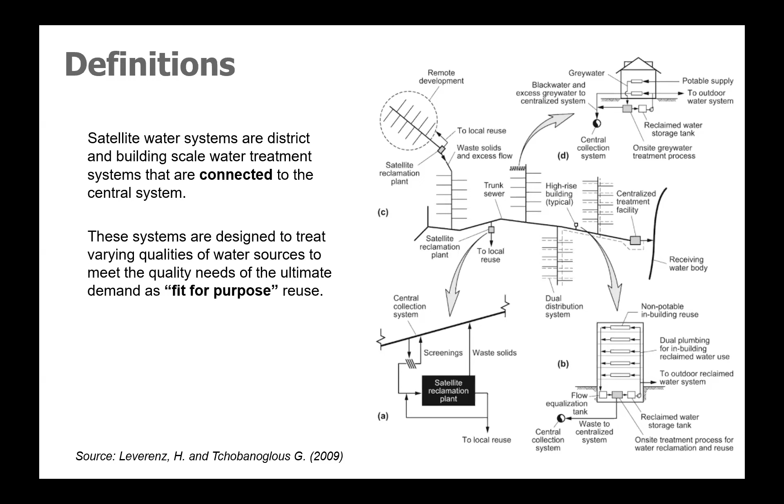One of the great opportunities we have with implementing these distributed solutions is that you can treat the water to fit the end use purpose. For example, you might have a different water quality objective for, say, industrial cooling versus irrigation of a park or flushing toilets. So fit-for-purpose water reuse is an advantage of this type of approach.

I just like to throw a few ideas out there about what that opportunity is. I mentioned residential buildings, I mentioned some commercial buildings, right? So it's not always about extracting wastewater. It can also be about harvesting rainwater or harvesting stormwater, two very different supplies.

Those can then be used for, say, what you see in the top right there, for cooling applications, right? And what we tend to see with the use of rainwater and stormwater is that it's quite seasonal here, and I'll get into that a little bit later.

On the bottom right, you might see more of a district, and this is representing a mining system that I described above, for uses like golf course irrigation or even agricultural applications. So it's taking that water supply where it is most needed. And on the bottom left, you will see both gray water and black water, as they're called.

Together, they are wastewater coming together for on-site treatment to hit the big three, as I like to call them, the non-potable water uses of irrigation, toilet flush, and cooling, which is what we really see on these site-level commercial buildings.

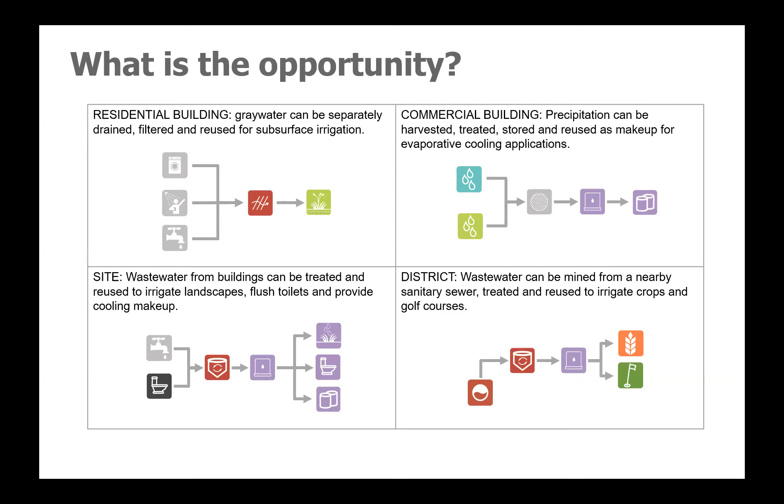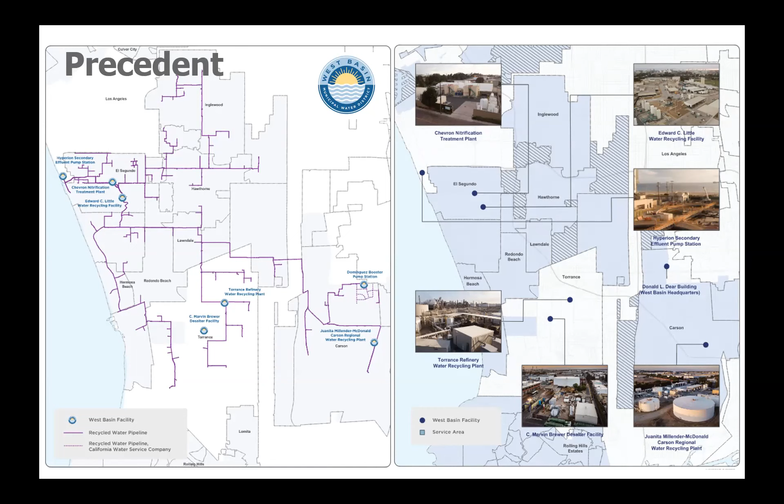I like to give this precedent to highlight that this infrastructure approach is not purely something deployed on a private level or even a site level. This is down in the LA area. The West Basin Municipal Water District has for many decades now deployed a distributed approach to water reuse. On the left is the recycled water network for distribution, and on the right is some of their facilities distributed throughout that network that perform reuse and other purification functions to serve that network.

This is really a satellite network deployed at the public utility level to help diversify the water supply down in Southern California. So a region that optimizes the system to take advantage of ideal scale will reap the benefits in terms of resilience, cost, GHG emissions, and water security.

I won't get too much into benefits here. Anne actually has a great presentation from a report she and the Pacific Institute are working on, so I'll just give you a teaser. But this is a nice graphic in terms of thinking about the network.

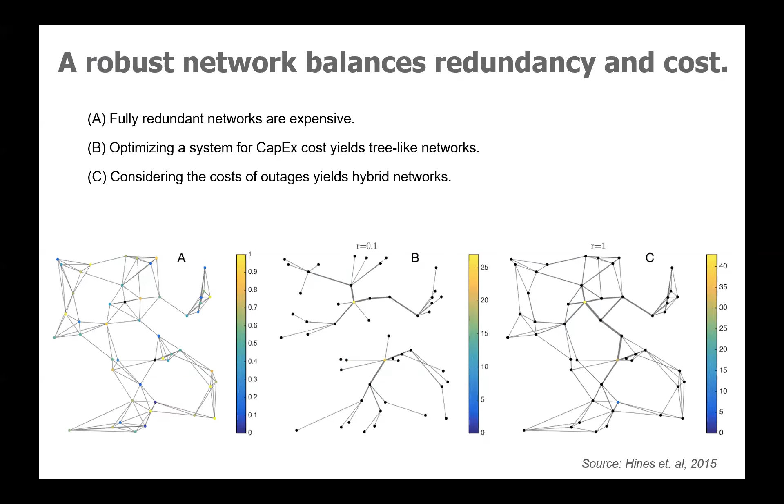So I keep talking about these networks, sort of in network theory and thinking. If you have a lot of redundancy, a great engineering term, you have so much resilience, but that's costly, so we can't have too much redundancy. But if you don't have enough redundancy, you have these very fragile nodes that if they break, you can lose a whole branch of a network. So what we are trying to balance as we rethink the way we supply and treat water at an urban level is what's the right balance of costliness and redundancy.

So I'd like to share that graphic—engineering design and why it matters to get it right. I'd like to point to some resources. There has been some really great work, especially here in the Bay Area, on this topic.

The on-site non-potable water reuse practice guide, I believe published in 2017, is actually linked now on the State Water Board's website for the page that links to the development of SB 966. It's a well-accepted resource for those considering these systems, so I highly recommend getting yourself a copy.

In addition, we have the National Blue Ribbon Commission for On-Site Non-Potable Water Systems and the U.S. Water Alliance—great national resources with a number of really great publications. SFPUC has been a partner with those organizations. I also like to highlight ReNUWIt, a research collaborative including Berkeley and Stanford here locally. Especially Stanford has their Codiga pilot facility now, which has been a tremendous resource for pilot testing of novel and small-scale technologies.

So reinventing our nation's urban water infrastructure is indeed what we are doing. I like to highlight that great academic resource we have here in Silicon Valley.

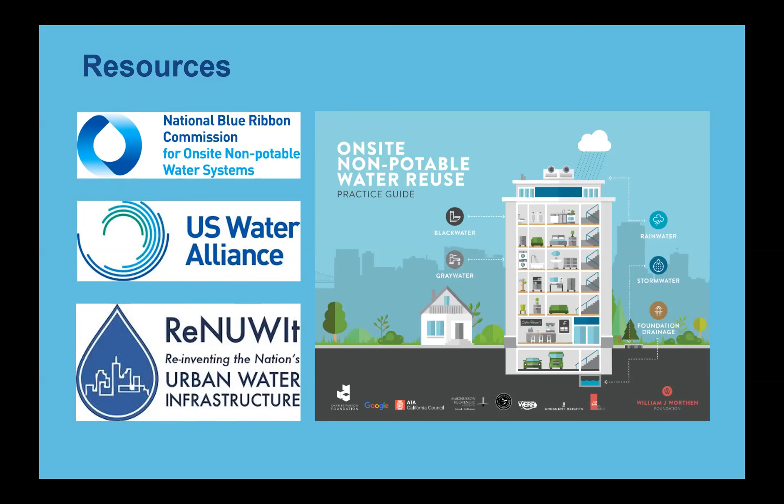So the engineering water balance concept: water balance is the idea that within a given area—what we call, in engineering terms, a control volume—we have to balance our resources. More and more we see new developments or existing areas looking at how best to manage their water resources, so we have to do an accounting. This is an example of that accounting, trying to understand the opportunity. This is really our first chance in the design process to identify where our resources are within that study area, and what our demands are.

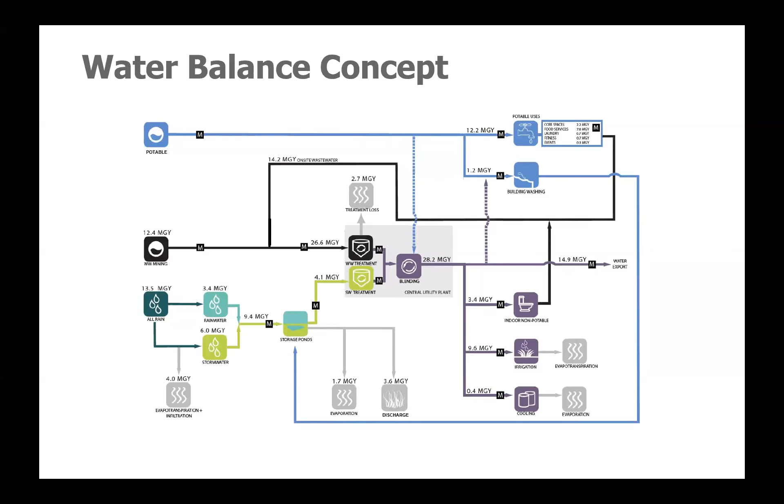It sounds simple enough, but as you can see with this diagram, it can get quite complex when we start to account for all the environmental water from rainfall, all the end uses like evaporative cooling, and some of the more unique potable water uses. And of course, potable water that makes it down the drain is a great resource as wastewater.

So just to keep it simple, there are some considerations when we think about how we size these on-site non-potable water systems. I'm going to focus in the next series of slides on a wastewater treatment system. In the wastewater world, we have flows and we have loads.

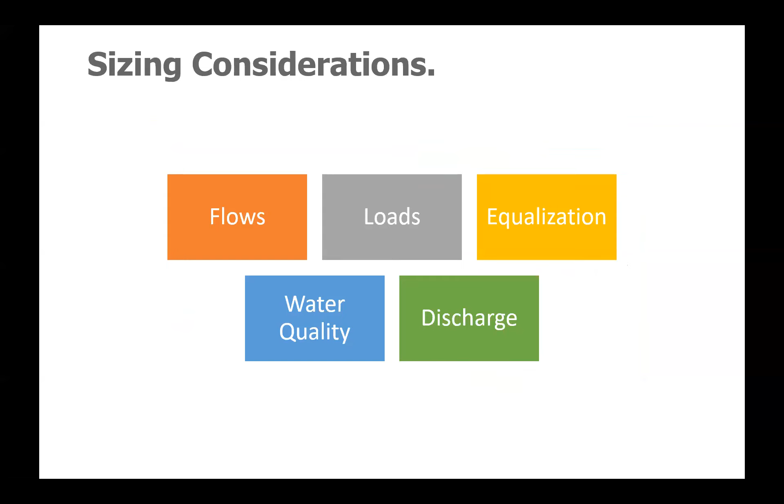That's sort of how we think about sizing treatment plants. But there are other on-site considerations, like at what pace are those flows coming and how we equalize them, what's the water quality, and what are my discharge requirements?

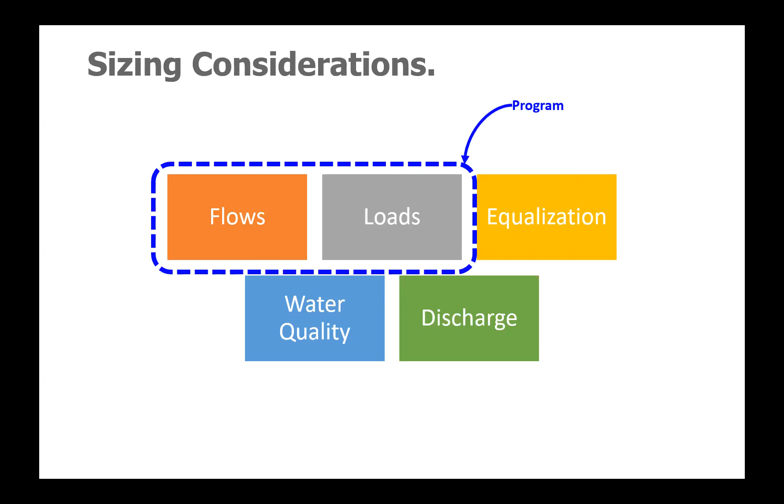So really focusing here on flows and loads, we can start to understand for maybe a facility where we don't have an understanding of what that water quality might be for a new building. We have to use the information we have, which is this idea of a program, the building program, to really identify how the system needs to be designed. There otherwise is no data.

So I'd like to use this SketchUp or bubble diagram to point out, when we talk about program, what are we talking about? This is an example of a school. How many students, how many people might come and visit the auditorium? Are people taking showers? Are there visitors? These are all very detailed considerations that have to be taken into account when you're looking at developing an on-site wastewater treatment system.

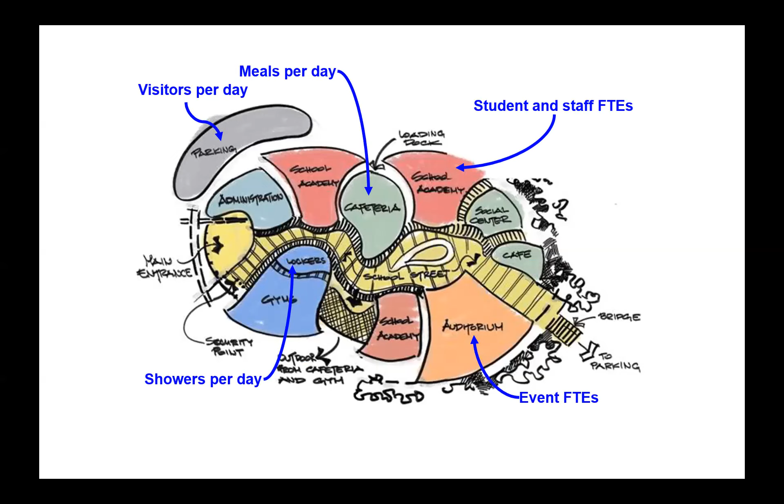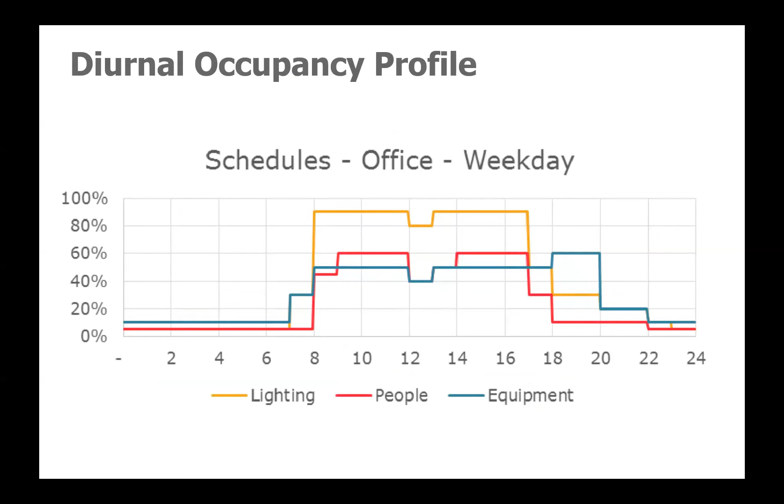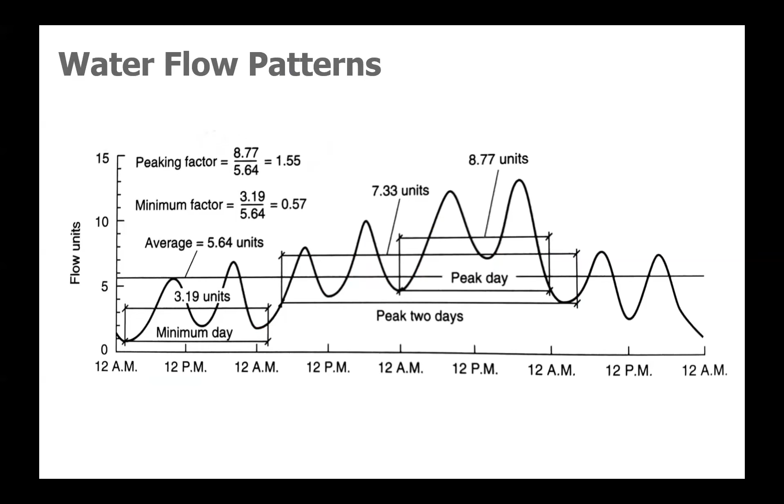We like to look at over the course of a day, how many people are coming in, when are they there. This is taking an example from the mechanical engineering world and applying it here to the water world, where we look at flow patterns and understand over the course of a week, a day, how is this building, how is this facility being used? This is a critical component of the design engineering process.

So we take the FTE, the full-time equivalents, and how much water they're using - the flows, how long are they there, this idea of dwell time - what load are they exerting while they're at this facility. It's not that people are living here; they go home at the end of the day if it's a school or institution.

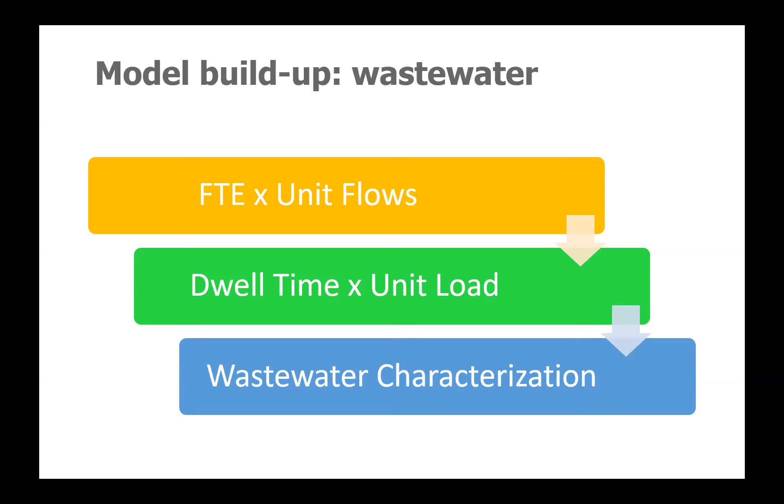And so we end up with what we call wastewater characterization. This is a very important part of the engineering design process and cannot be skipped. So then we decide, okay, what do we need to take? How do we take the waste out of this water? Generally we can think of solids, organics, and pathogens as the categories we need to look at. So when we do the treatment design, we're looking at all of these factors.

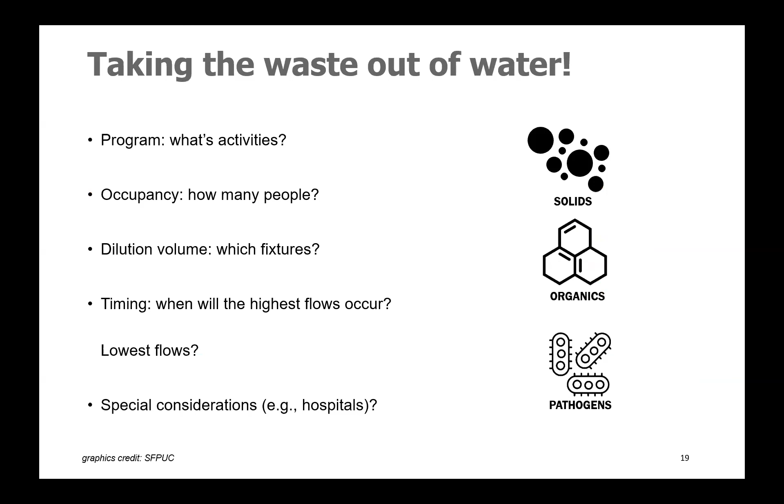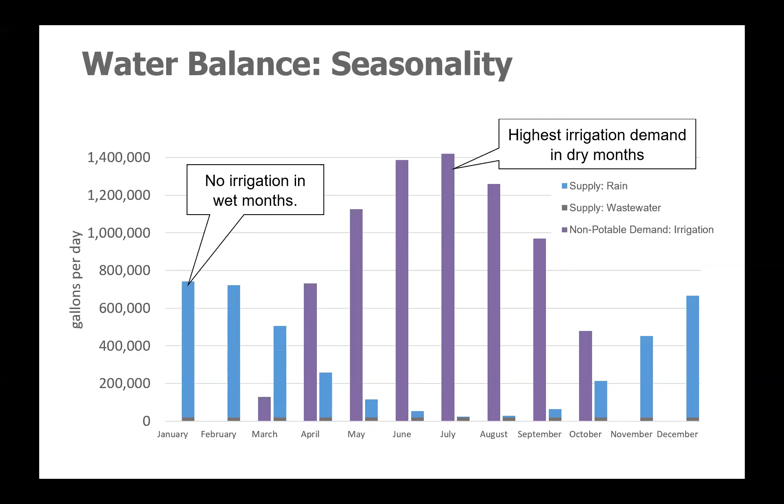What we see is that we have a very high demand in the summer months - June, July are shown as the peak in this graph. And then we have the natural supply of rain when we don't really need irrigation, but we don't have enough of that rain to really store it and use it throughout the rest of the year - that would be expensive. So that's where we really have this constant supply of wastewater coming in. Seasonal variability is also a very important part of the engineering process.

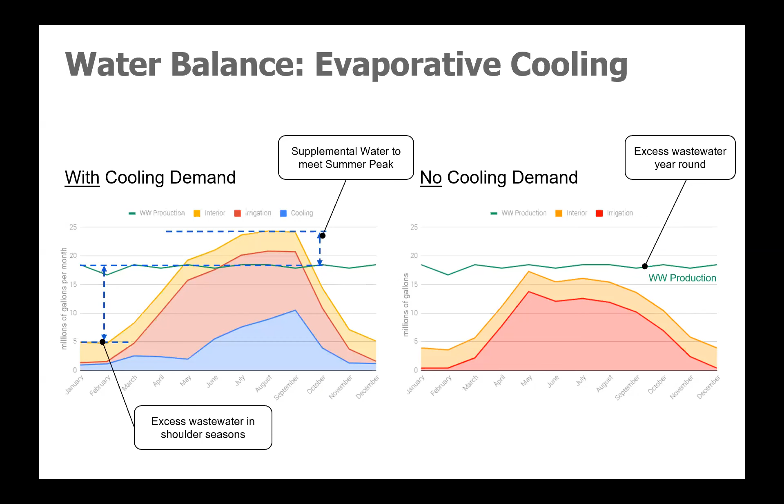That's a really critical evaluation to do for an on-site system, because what we see regionally is that it's actually very hard to meet all of those seasonally peak demands. We often end up supplementing in our peak demand season with potable water because we don't have the resource. So this is an evaluation that really helps us identify the right infrastructure for a project.

So why does this all matter? You may or may not be able to read the text on this slide, but going back to that water reuse practice guide, integrating this kind of thinking into a design process has to really happen from the beginning.

If you refer to that guide, you'll see these decision points along the way, even before design starts, in the planning of a project. There needs to be consideration, because these are infrastructure systems, all the way down to that detailed understanding of program. If you don't have that integration with the design, you sometimes fail to meet the demands of that project. We want to make sure these systems are designed to meet the needs of that project. There is no one size fits all when it comes to an on-site reuse system.

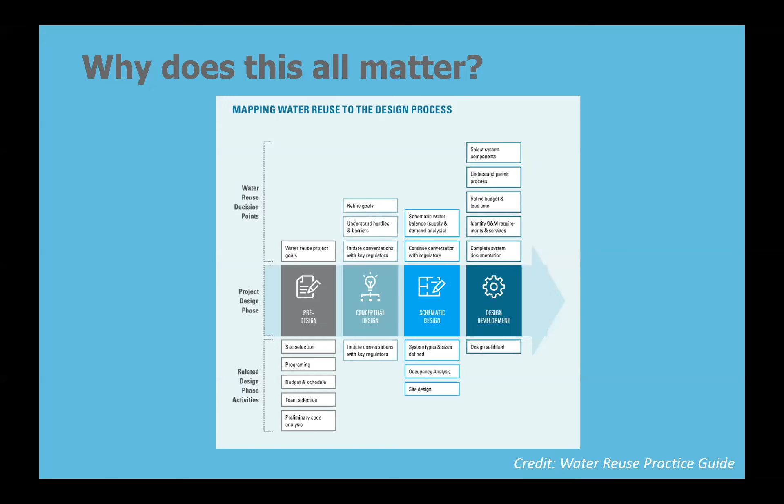So now we'll get into the regulatory part, which is always fun.

I like to talk about this as that we currently have some barriers to implementation that are regulatory. Right now, depending on whether your source water is stormwater or wastewater, you're following a very different permitting pathway today. There are plumbing codes that can be used for permitting stormwater. Curiously, stormwater is categorized as gray water in the plumbing code, which, as an engineer, are very different sources. Our current code doesn't really consider the importance of that distinction in how we think about these sources.

From a wastewater standpoint, all of these projects are permitted through the regional boards. Here in San Francisco, the SF Bay Regional Board, there are a couple different pathways, but each project has to make that determination on its own. It's kind of an individualized approach, a bit of a square peg in a round hole, because these regulations, the California Code of Regulations Title 22, were really written in the late 90s, mid 90s, for municipal recycled water plants. We're lucky to have great advocates at the regional board helping usher these permits along, but it's not a system suited to these types of scales.

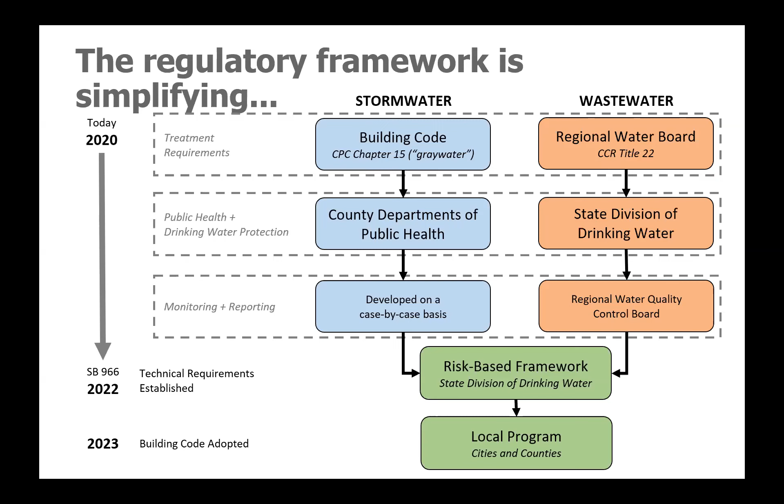It's notable, early on I mentioned some smaller residential systems, like taking untreated gray water and using it to water fruit trees on your property in your backyard. That type of system doesn't really involve any treatment, and it's not addressed by this regulation. Same with rainwater reuse, rain barrels at the home.

So then, as SB 966 is codified, we will see the permitting pathway shift to these local jurisdictions, defined as a city and county. Local programs really have to be established for both existing and new systems. And it's very clear in the regulation that if there's no local program, there's no on-site non-potable water system.

I think there are some folks committed to seeing a smooth transition here, but there is a goal at the state level to move the permitting to a local jurisdiction. Of note, water and sewer providers can and should be incorporated into the program formation. If they identify adverse impacts, such as reduced flows to a sewer system, that local jurisdiction may be required to mitigate for it. So it's really important to be in partnership with that.

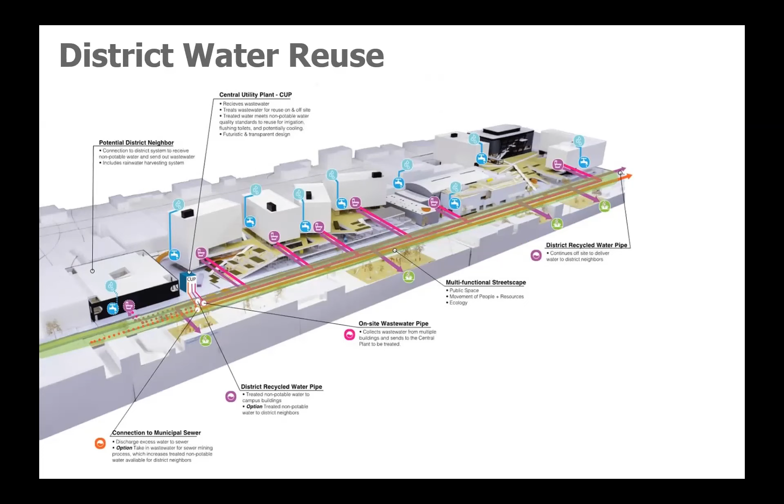District water reuse brings benefits from economies of scale. Now, this is not your local water wastewater district—this is a term deployed at the development scale, to look at multiple parcel systems that can collect and distribute water across a whole development area. I wanted to introduce that terminology.

This is really a call for local leadership to try to understand some of the complexities at the governance level, and understand that when we do get state regulations, they'll mostly focus on the technical side of implementing these systems and protecting public health, which is the Division of Drinking Water's role. The local governance component of SB 966 is really to be determined. So what can we do locally to ensure we have diverse water reuse infrastructure?

I'll go through just a few projects quickly. Corporate water stewardship is really looking at environmental concerns, water security, and long-term costs, frankly.

Some might be familiar with the Microsoft campus locally. My firm was involved with the concept design here, which achieved a great win in terms of reduction in water resources, and it's under construction today.

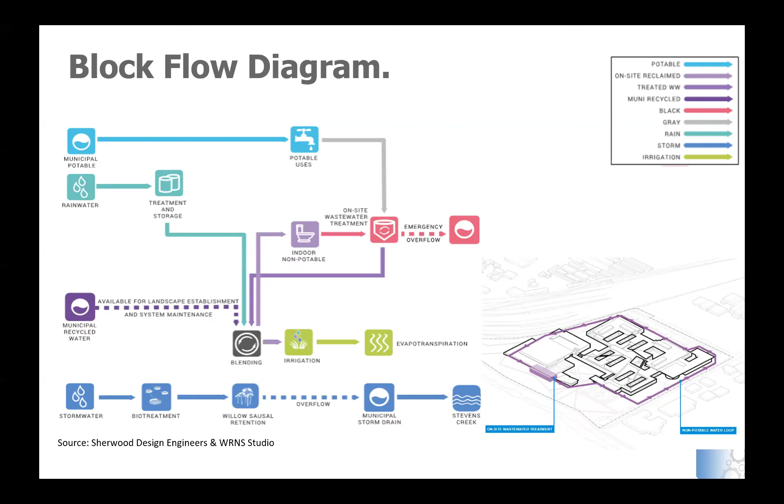This is what the block flow diagram looked like for that project as we started to understand the integration of natural features as well as the water resources available. I mentioned that seasonal water balancing act.

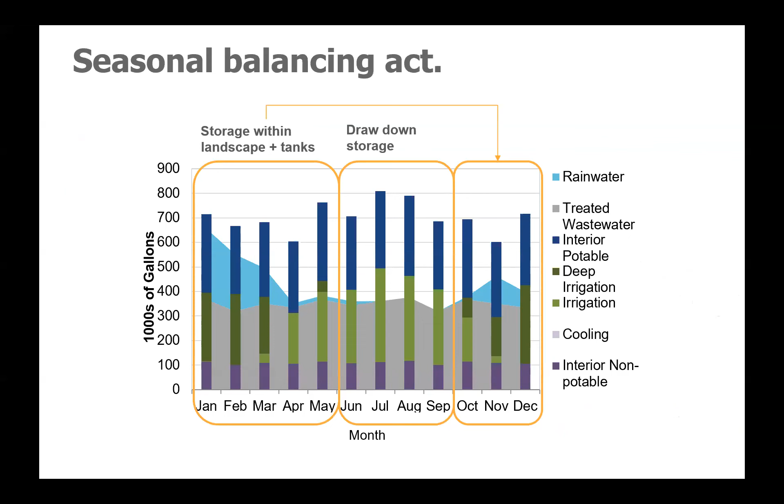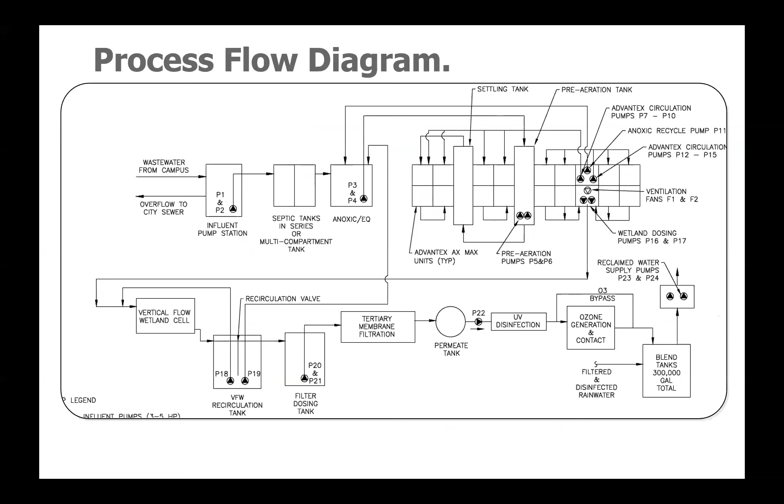This project actually implements a lot of storage on site to do this balancing act. I won't get into the details, but there is some detailed engineering that goes into the treatment process, and there are a lot of great technology precedents for this scale of system. At the end of the day, we're looking not just at the functional use of that water, but how it interacts with the landscape around it, and how we're managing that water seasonally.

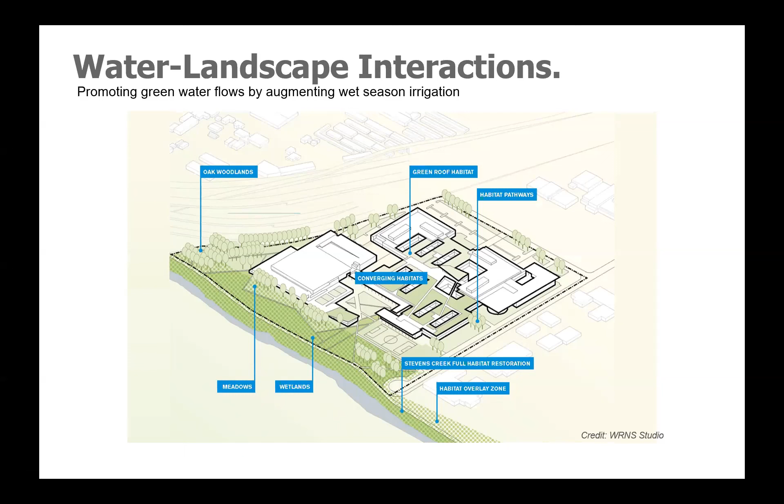Quickly, I'll give you a sneak peek at the Google Bayview project. It's an interesting opportunity to look at the network connectivity in terms of where, in our existing network, an on-site system makes sense.

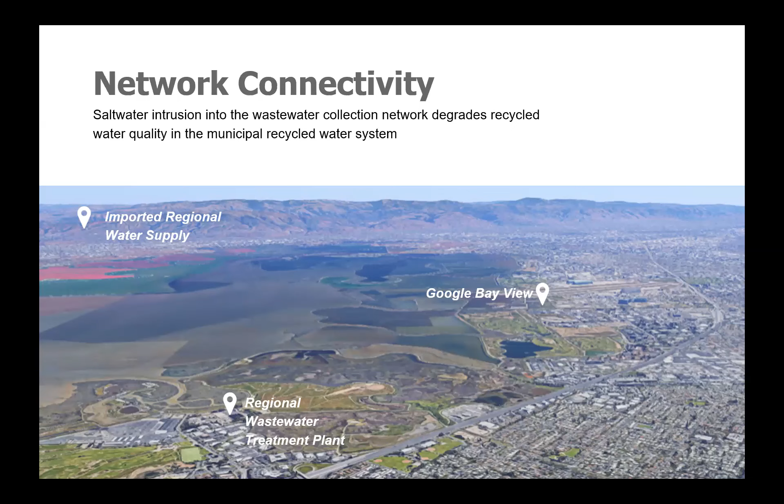Here's a diagram showing that the regional facility where this wastewater from the campus would go is quite far away, and there's an existing issue with saltwater intrusion. Given that the potable water serving this area is imported from far away, what can we do as we develop a campus to mitigate for some of these existing conditions?

Again, we looked at a water balance that demonstrated we have enough collection of rainwater, stormwater, and wastewater to meet all of the project's demands and then some. This is really a great opportunity for an on-site system, and I hope we can all see more of this project in the future.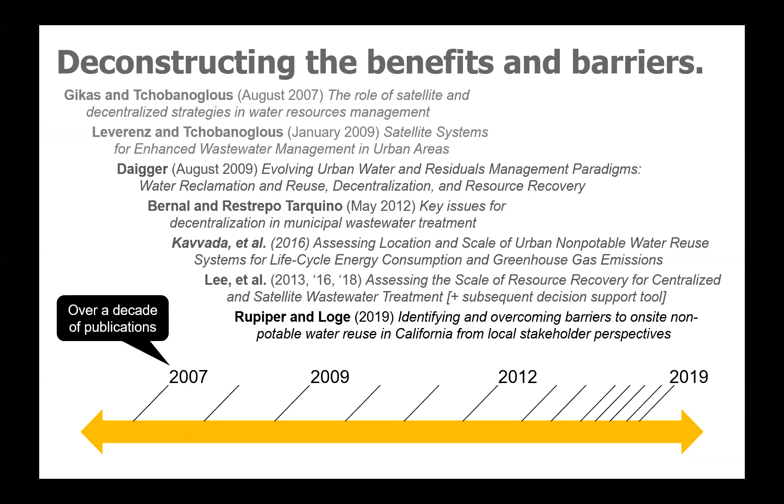I'd just like to point out that there's over a decade of work that has gone into looking at some of these systems and proven out again and again that there are really great benefits to exploring these distributed solutions.

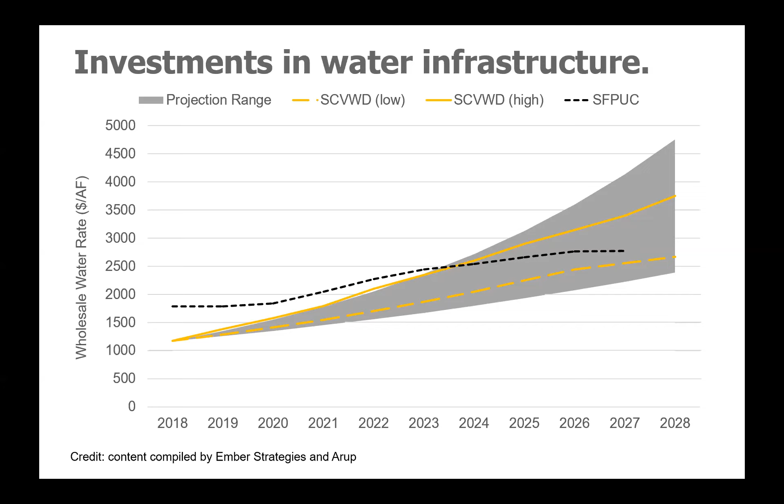I want to understand that investments in water infrastructure will happen. This graph shows what we see for some of our regional water suppliers, that there's going to be an increase in cost. So how are we preparing for that, both on the public and private sides? And what projects should be built in response to climate change, urbanization, aging infrastructure, and regulatory constraints—not just in terms of changing on-site reuse infrastructure, but more constraints on what we can discharge to the bay as we discover the water quality impacts there.

So when you start to really understand a lot of these stressors, we need as many tools in the toolbox as we can get. And that's what these systems can provide to us if done well.

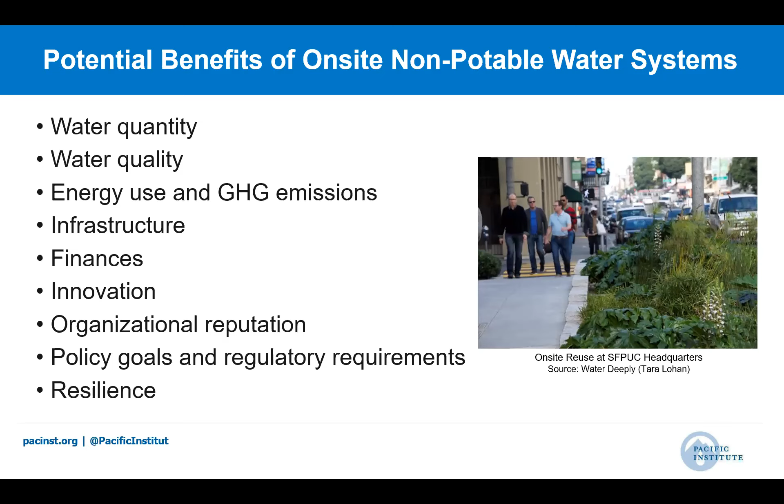We recognize that there are a lot of potential benefits, but a lot of these benefits, particularly at the system level, often go unrealized. So in this section, I really want to talk about strategies and considerations for ensuring that this broader range of benefits gets realized as we're implementing these projects.

But I want to start with a couple of key concepts. Realizing a lot of the benefits associated with on-site systems really requires designing, planning, and operating these systems as nodes in the larger water system.

Likewise, we also know that there are a lot of potential beneficiaries of on-site systems. This begins with the site that's actually implementing the system, and there's clear benefits there. But those benefits, when managed appropriately, can extend outwards to include water, wastewater, and recycled water systems, as well as people, communities, and broader ecosystems that these systems exist within.

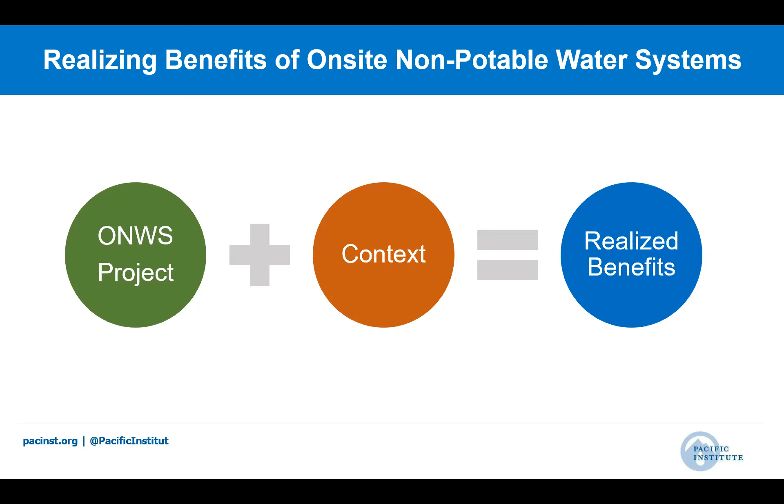As we are going through this and thinking about how do we best realize and maximize the benefits associated with these systems, the issue of context really just kept on coming up for us, and so we summarized this in a list of contextual factors that are determinants of whether or how these regional or system level benefits get realized.

So at the foundation of this is location. This is proximity to existing recycled water networks, elevation differences, just these very practical location considerations.

Time—a lot of these benefits accrue over very different time scales. Some of them might be realized more immediately, whereas others take a longer time to be fully realized.

The magnitude of the outputs from these systems—how much water is being produced by an on-site system, greenhouse gas emissions, all those sorts of things.

Likewise, the scale of the system—there are trade-offs in economies of scale between treatment and conveyance. This is a really important factor, and there's been a lot of really great work done around optimization modeling, looking at system scale and some of these other factors.

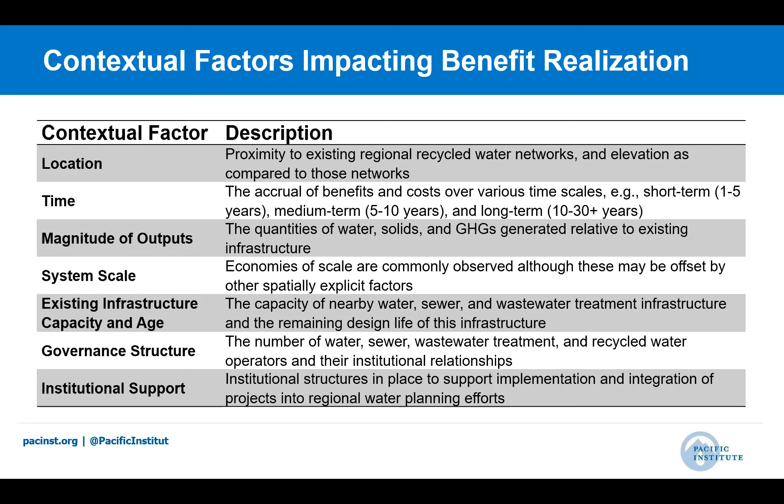And likewise, institutional support. I think the issue of integrating these systems into regional planning efforts is very important, and even more so with SB 966. So just what institutional structures are in place to support the implementation and integration of these systems.

Just thinking about the practicalities of on-site water systems, the biggest opportunities exist in locations where there's new or redevelopment type projects. Likewise, commercial, industrial, and multifamily residential properties produce a large amount of wastewater, so there's just more supply available at those sites, and likewise areas that are not served by existing recycled water supplies.

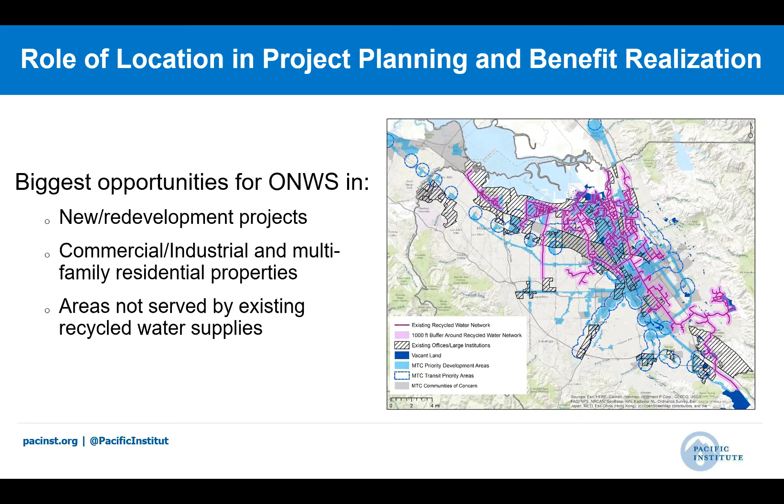So to summarize, we see a lot of potential benefits of on-site systems, and these benefits can benefit many different stakeholders. Benefits can also accrue across multiple scales, such as the site, water system, and community. But context ultimately determines the realization and magnitude of benefits. One of our main takeaways was that realizing this full range of benefits of on-site systems is going to require stakeholder collaboration and integration with regional planning efforts.

So I want to use that as an opportunity to transition to some work we did looking at the types of benefits that on-site systems can provide in Silicon Valley, thinking in a more spatially explicit way about realizing these benefits in the region.

Even within the region, there's a lot of variation in how much of the water supply is imported. In San Mateo County, upwards of 90% of water supplies are imported. Santa Clara is in the range of 60-some percent, but uses a much larger quantity of water overall. So we can see that as a region, we're really dependent on imported supplies.

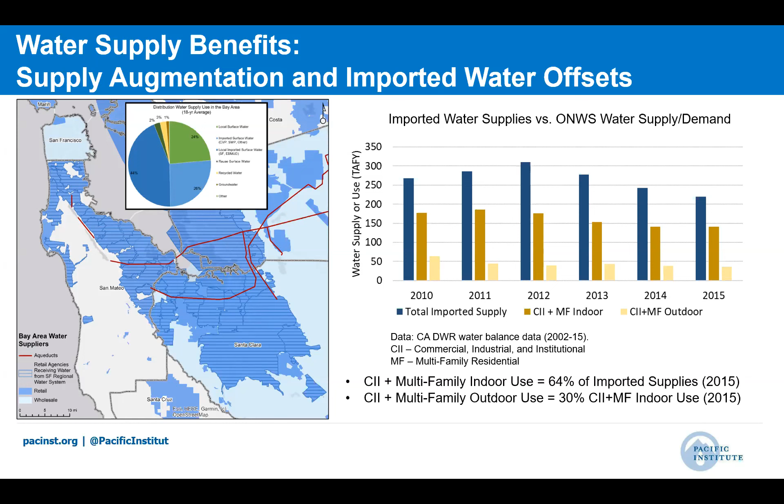The other major benefit of on-site systems that we looked at here was thinking about infrastructure augmentation.

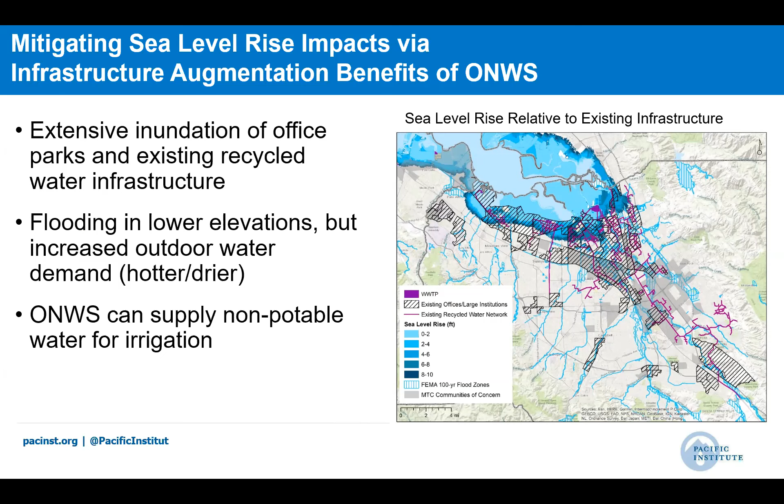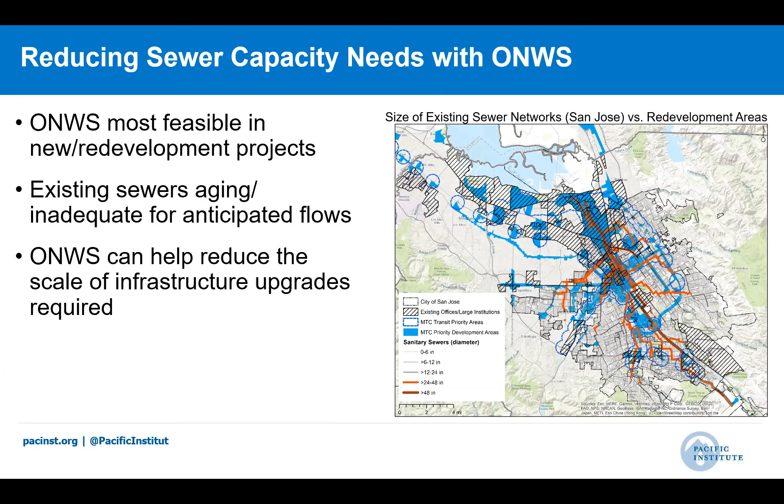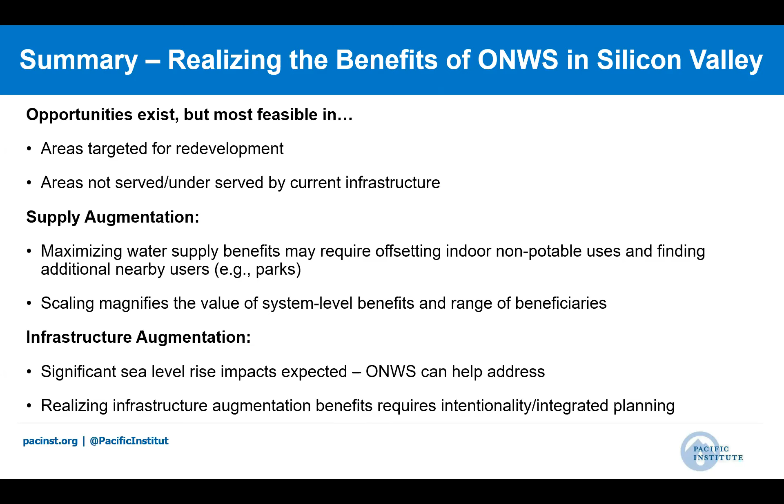So the next steps with this work: the report featuring a lot of what I talked about today will be coming out in January, and we're starting to move into phase 2 for this project, which consists of a variety of stakeholder convenings and a synthesis report from those activities. So with that, thank you, and I'm happy to answer any questions. If you're interested in the phase 2 work, feel free to reach out. And with that, I'm going to stop sharing.